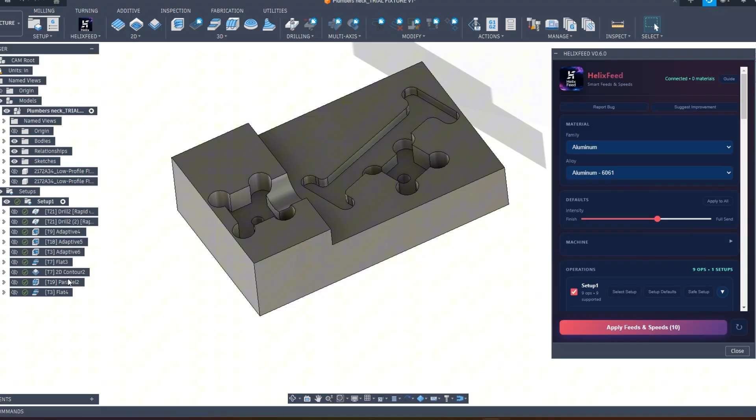Hey guys, I just wanted to demonstrate Helixfeed, which is a Fusion 360 plugin that I'm currently developing, which automatically calculates your feeds and speeds directly inside Fusion 360's manufacture workspace for milling.

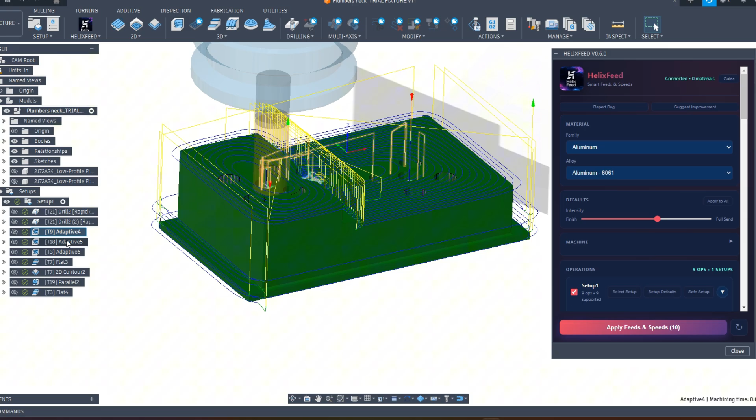So the way it works is you would just program your part exactly how you always do, but instead of focusing on your feeds and speeds while you're programming, you just worry about what tool you're using and constraining its geometry. Once you have your part fully programmed, then you would open up Helixfeed, select your material, as well as material alloy,

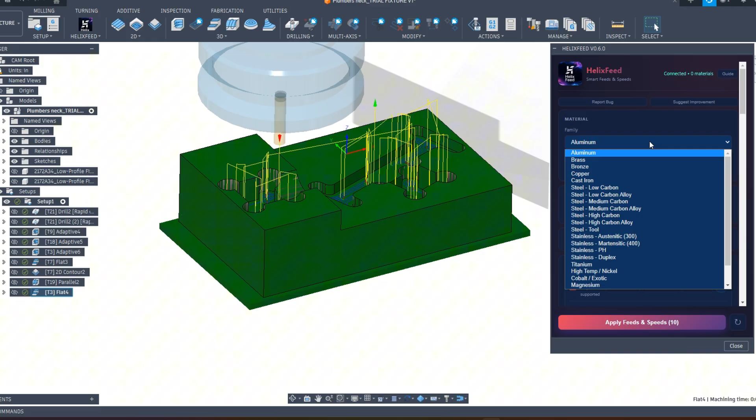and you could come through Helixfeed and adjust its parameters based on intensity or how aggressive you want to machine. So if you wanted to do light finishing cuts, you would scroll this intensity slider all the way over to the finishing side. Whereas if you wanted to be fully aggressive, you would move it over to the right-hand side. And you can see how it adjusts your recipes.

Helixfeed has a few different machining modes built in that in most toolpaths automatically detect what you're trying to do. Basically what that does is adjusts the radial to axial bias. So for example, if you're finishing a wall, you'd want a relatively high axial engagement and a relatively low radial engagement. Whereas for adaptive roughing, it's similar, but we want a bit more aggression on the step over.

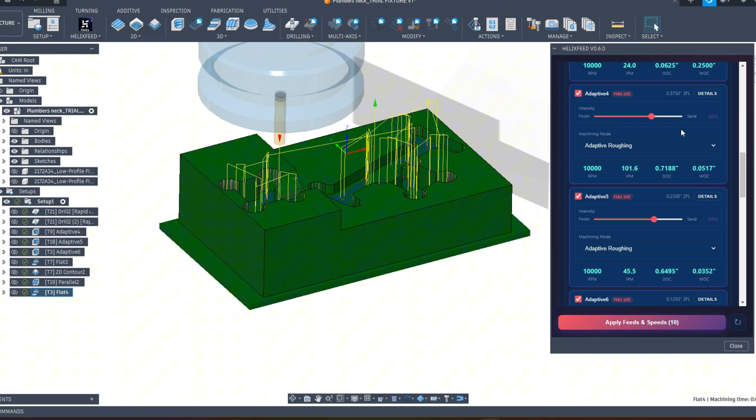So what you would do is you would come through here, tune these in until you see a number that you like. And once you're happy with it, you would just select Apply Feeds and Speeds, and Helixfeed will automatically populate those recipes directly into your toolpaths.

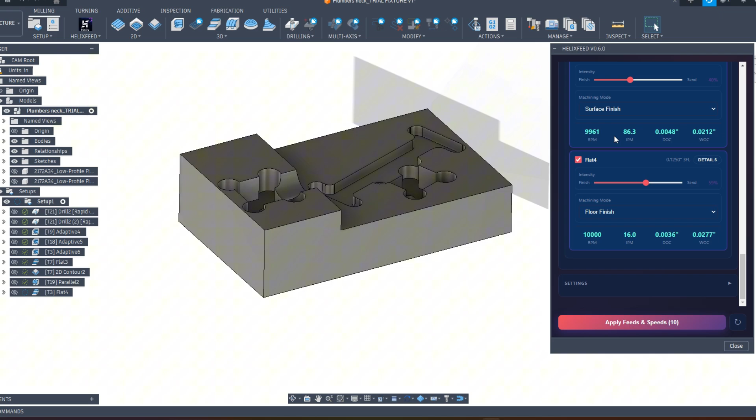So Helixfeed is going to try to put you in the correct window for surface footage per minute, as well as accounting for chip thinning, tool deflection, machine rigidity, radial engagement, circular path compensation, spindle power limits, and the specific machining strategy you're running. So that's where Helixfeed is at right now.

It's still in active development, and I'm adding to it every week. And what would help me the most right now is real machinists putting it through its paces on real parts.